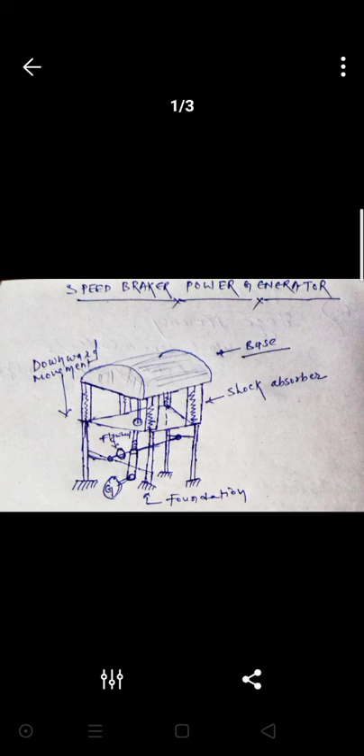Here we can see the 3D view of our project. This is our base, it's shock absorber, the foundation of our prototype. Here you can see we have attached a flywheel on a shaft, on which we have attached a rack and pinion system on this base and this shaft, and also a flywheel and a disc. In the next picture we can see the front view of our prototype so we can understand how it works.

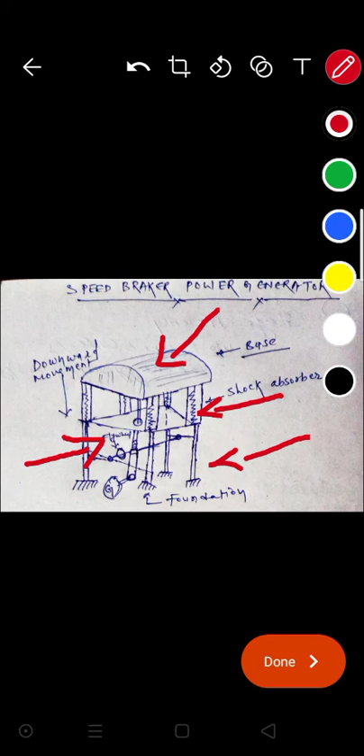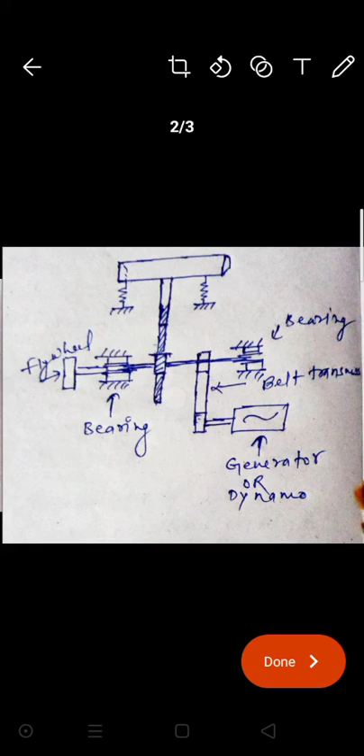Here you can see the front view of our system. It's our base, attached with a shock absorber. It's our rack and pinion system. It's a flywheel and a shaft, supported by bearings, and here there is another gear system, or you may say a disc, through which we will transmit power to a dynamo through a belt transmission system, and it's our generator.

So when the vehicle enters through this base, which we will install on a highway, when any vehicle rides through this base, due to the weight of the vehicle, our system will have a downward motion or downward displacement, and the energy will be stored in the spring.

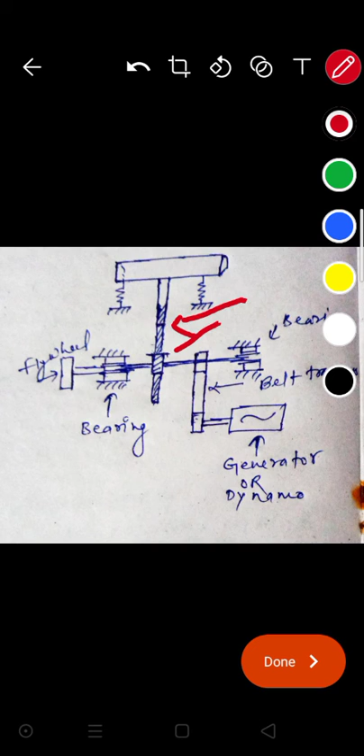In the next step, due to the downward motion of this rack, we will get a rotation in this pinion, and this pinion is attached to a shaft, so this shaft will also get rotary motion. We know that the power transmission is not continuous, so we will apply a flywheel here so that we can get a regular amount of inertia to drive this system.

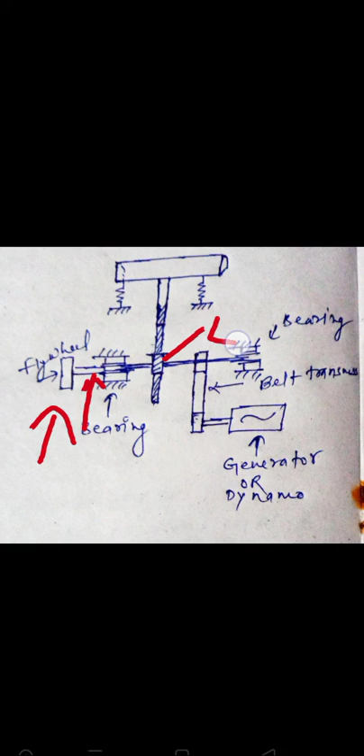A disc is attached to this shaft, which will transmit power through the belt transmission system to this dynamo. Hence we get movement through this shaft, through this base, to the rack pinion system, pinion to our flywheel and this disc, and due to this rotary motion of the shaft, we have attached a belt transmission system to this disc and generator, so we can get movement in the generator and generate electricity.

So basically, the more the traffic on the highway, the more the amount of electricity we will get. It has a wide scope of application and needs a lot of innovation in this area, so that we can utilize our highway as a source of electricity generation.

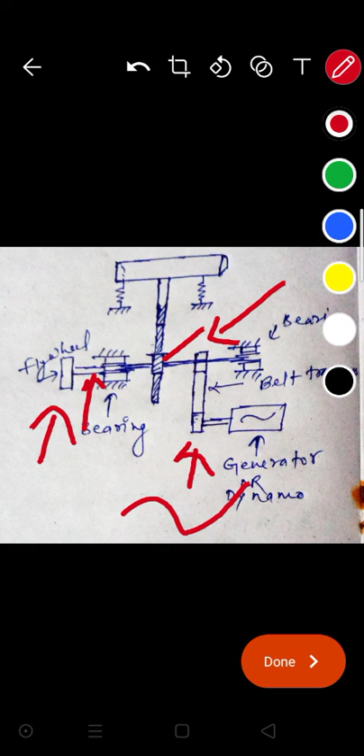It may be capable of generating electricity in such an amount that it can light our highway at all times, and it is totally pollution free and a renewable energy source, due to which it may find a lot of application on our highways, so that we can get a lot of pollution free energy in the system. I think I am capable of giving you information about my project.

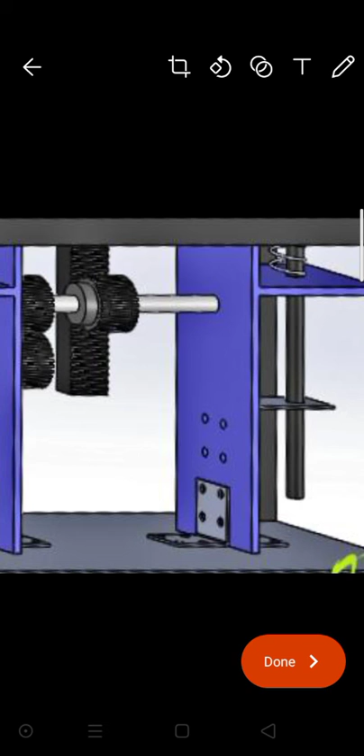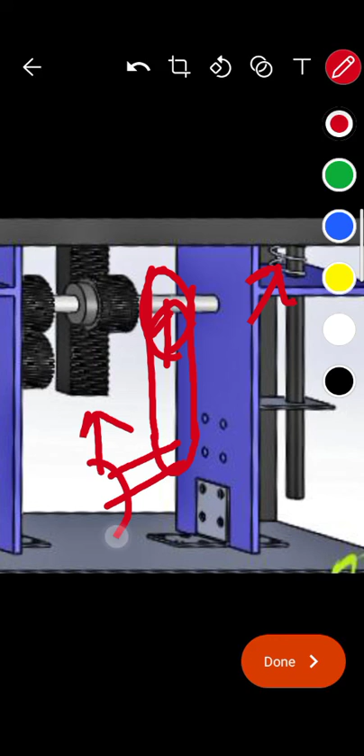So next, this is how our project or prototype will work. Here we can see the rack and pinion system, and you can see the base of the spring, and it's a disc. Here we attach the disc and system, and through this belt transmission system we attach a dynamo, so that we can get a regular supply of electricity and a renewable energy source.